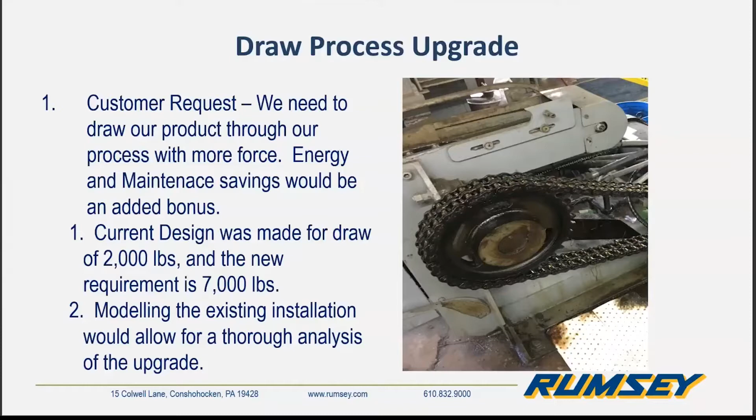So the process for upgrading this particular machine was to look at the draw chain itself, which would have to be upgraded because we're looking for 3 times the capacity out of the draw chain. And the existing draw chain just did not have that capacity. In addition to that, the sprocket that drives the draw chain would not be able to drive that new chain. So the first step is to analyze and select components for the draw chain and the sprocket.

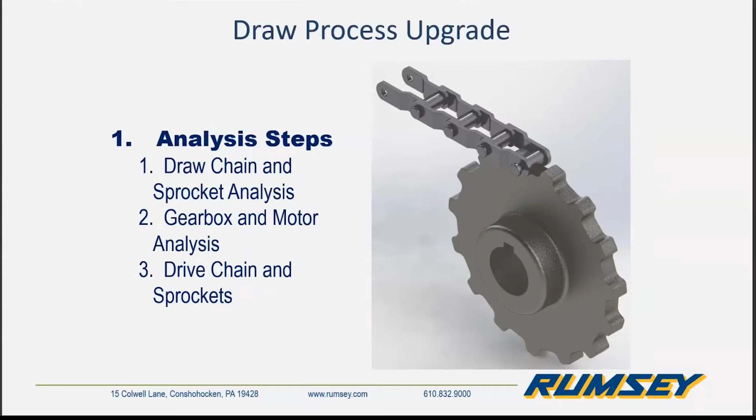And then the next step would be to pick a new gearbox. For the existing gearbox, we're looking at a worm gearbox with a 10 horsepower motor on it. That's what was originally on it. For that, we're also going to take a look at what we might be able to do to upgrade the existing dual roller chain assembly.

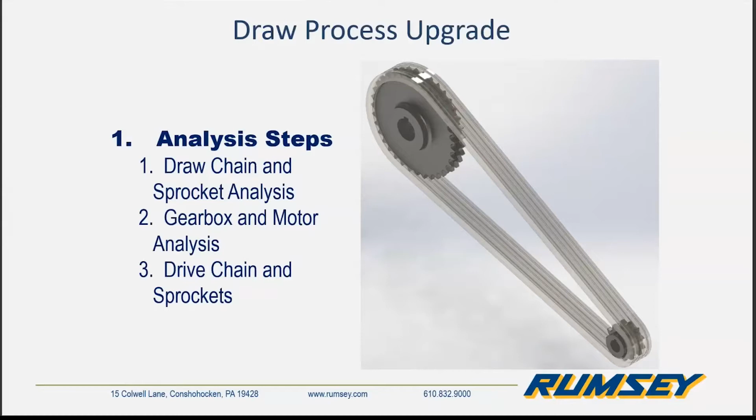Chain and sprocket, here's our first step. The challenge is that the new draw chain would be much bigger. All right. So what we need to do is take a look at the existing draw chain, the existing sprockets, and see what their capacity is.

And one of the requirements from the customer was to make sure that we did as much as we could to minimize the modifications to the existing structure. So even though these new components are going to be a lot higher capacity, they have to be able to fit into about the same space.

So there's a little video here. I'm going to show you, we're going to take these sprockets out. We're going to take this chain out of the existing setup just so you can see where they belong and how they have to fit in.

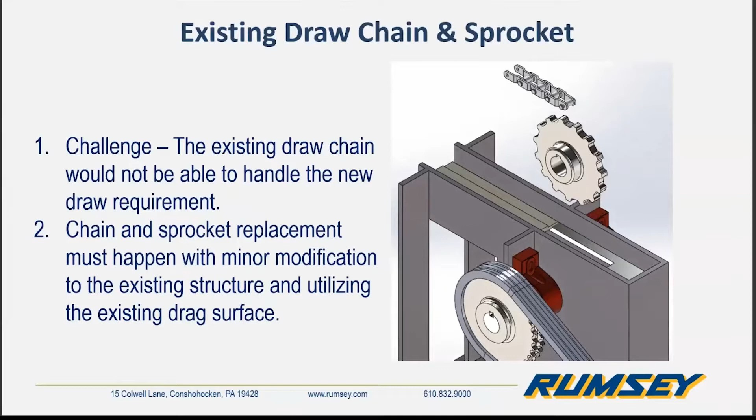Yeah, so when you work with engineered class chain, there are a lot of different designs for engineered class chain. There's attachment chain, which you can see in some of these pictures. There's some drag chain, which is the bottom left-hand corner. You're going to drag a product through, like wood chips. You're going to drag that off into a hopper somewhere.

There's a drive chain, which is in the bottom middle of your screen, and an agricultural chain, which is the bottom right and the top middle. So there are a lot of different engineered class chains. We didn't have to change anything. The existing chain was a drive chain. We're going to go with an upgraded drive chain. It is a roller drive chain, which is a little bit more efficient than just our regular welded chain.

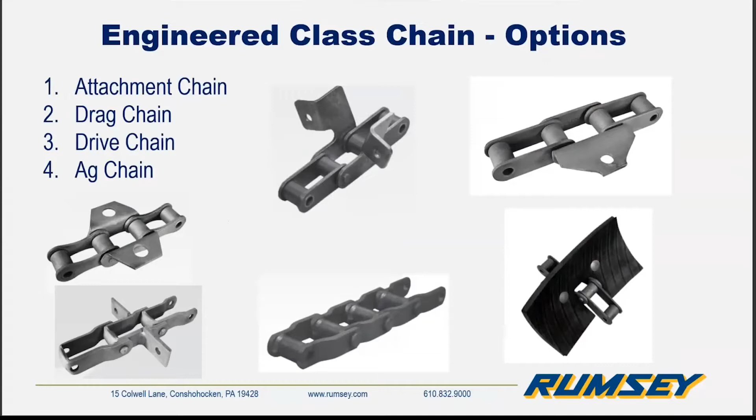It's kind of like an eye chart, but I'm not going to ask you to read anything. The new chain would have to be the same style to fit in the area necessary. But what we're looking to do is make sure that the service factor that existed, because this thing has run for the last 30, 40 years, was at least maintained or exceeded by the new design.

So the existing chain was an MXS 882 roller drive chain, engineered class drive chain, with a working load of 2,500 pounds. The original design load is 2,000, so your service factor is about 1.25 on that. So to get at a design load of 7,000 pounds, to get at least that service factor, we had to go with the MXS 1242 chain, which is much bigger. It's a higher pitch. It's about double the size, with a working load of 9,000 pounds.

Now we've selected, by the numbers, what that could be. Now, how do we fit? A lot of times when you change sprockets, you might use the same number of sprocket teeth. But in this case, if we had done that, the sprocket would have been at least 3 or 4 inches bigger, which would have meant a total redesign of the customer's structure. What we did instead was we reduced the number of teeth and found a sprocket that matched really close in size. In this particular case, the pitch radius only varied by about 0.3 inches, a little more than 1/4 of an inch.

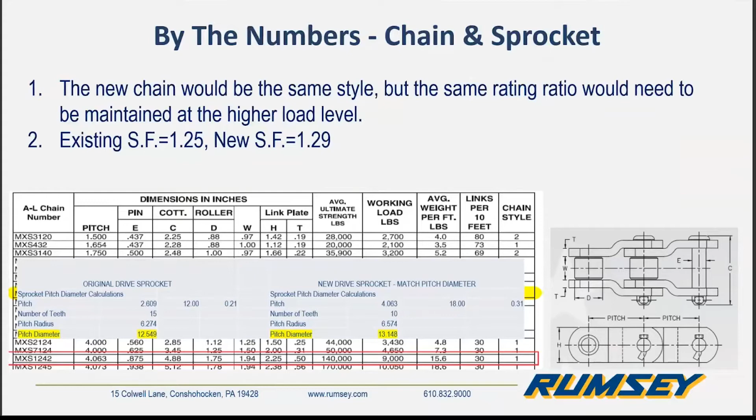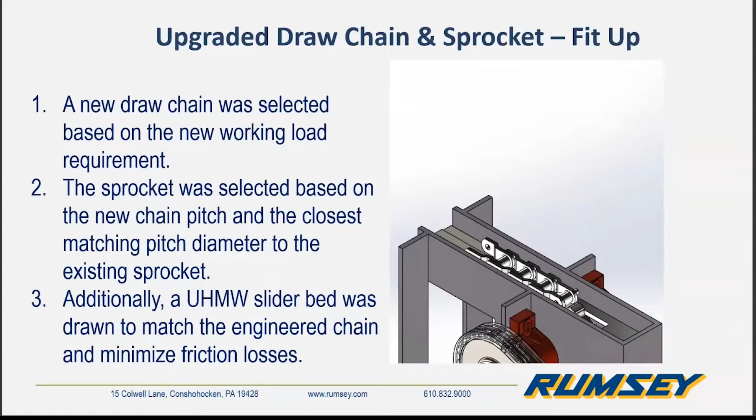One of the other things we did to minimize the friction losses on the conveyor bed itself was we added a UHMW nylon slider bed that really helps to lower your operational losses by reducing the friction. All along the 30-foot length of this drag bed, that nylon low friction surface was contacting the chain to minimize those friction losses. So here, what we have is pretty much a completion of the design, where the old sprockets are removed and the new chain is put on.

So you can see we actually made the structure transparent, so you could see the sprocket being installed on the shaft. Because we were able to find the right sprocket to fit into that space, the customer was able to do this with very few modifications to the original structure. And that really can't be done unless you do the modeling, unless you do the research and compare those dimensions and make sure that what you're doing is the right path toward the upgrade.

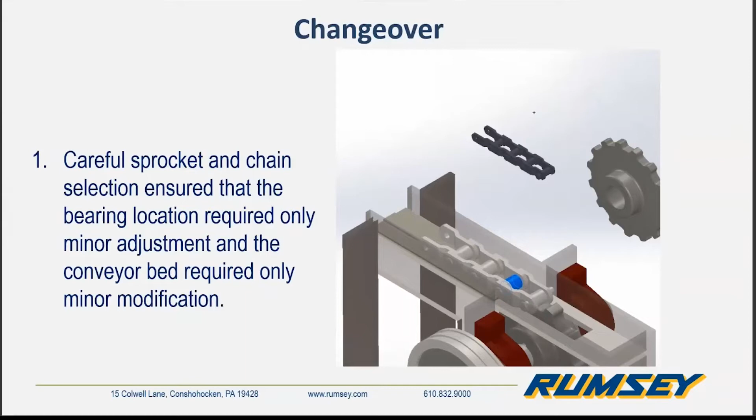Because you were able to change this and increase the capacity of your chain and your sprockets, the new chain and sprockets will allow a broader range of product to be run on this draw bench. What that means is if your old system was running for maybe 60 hours a week, because you can now run more and bigger and more varied product on the machine, maybe you're getting 80, 90, 120 hours a week on this machine rather than less. So that adds up to increased revenue because you're able to get more product out the door and higher availability of this machine.

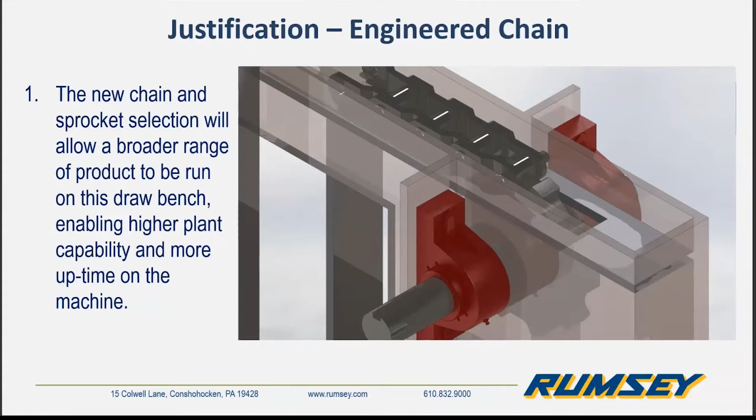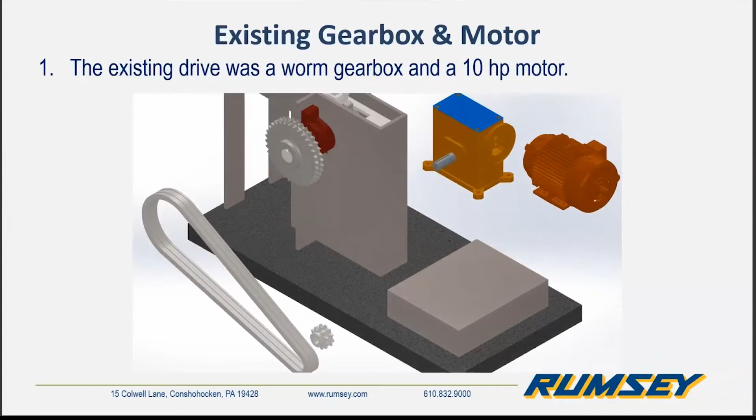Moving on to the drive system, the existing drive was an old worm gear and 10 horsepower along with a double roller chain and some sprockets. So here, part of our process is to download the models if they're available, and kind of take the system apart so that we know what we need to fit on and what we can use. Worm gears are very economical; that's what was existing. Worm gears are a lot lower efficiency than some of the newer gearboxes out there. So our goal here was to increase operational efficiency and save costs on runtime by changing over from this worm gear to something a little more efficient.

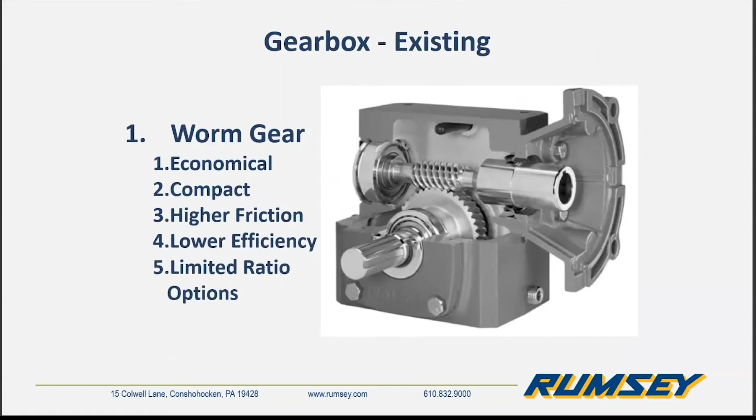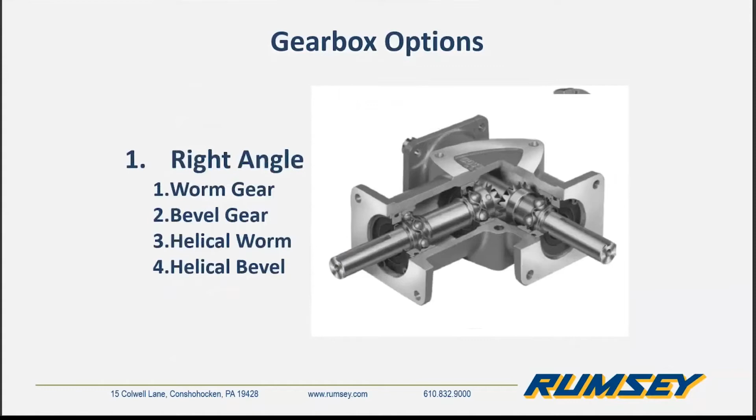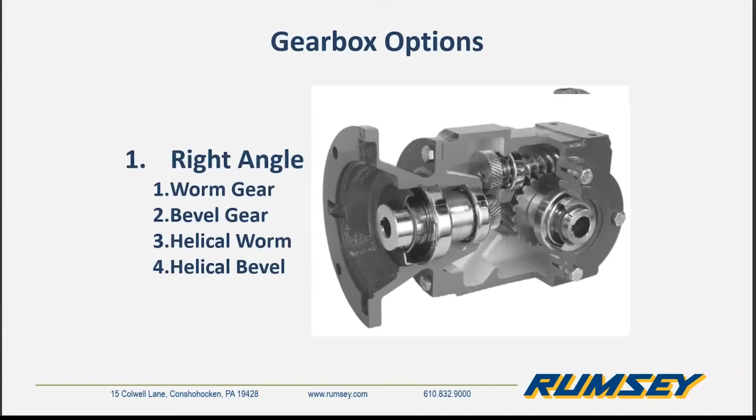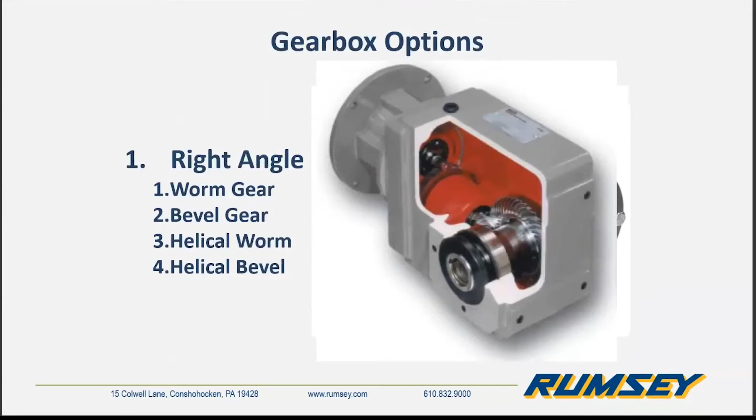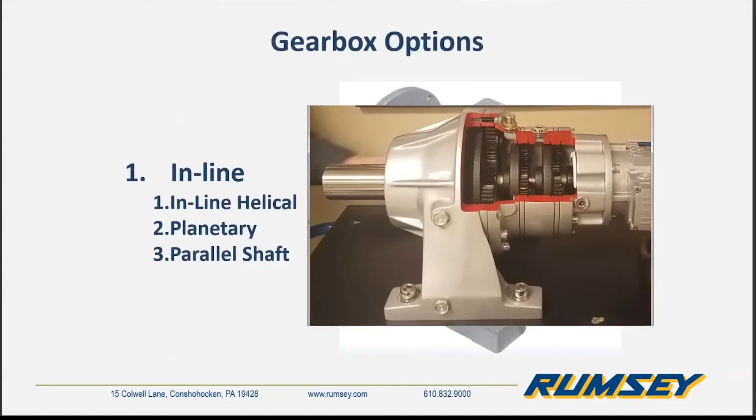These are much more optimized for much higher ratios than what was necessary here, and for much lower speed applications. And also a parallel shaft. That gearbox fits in certain niches, but it's not something people use a lot. Space-wise there are some niche applications it could be used in, but this one wasn't one of them. What we decided to go with was an inline helical because of its high efficiency, how compact it is, and the customer had some spatial constraints where they would rather have the motor point in the other direction, so we didn't use a right angle. They're also very economical.

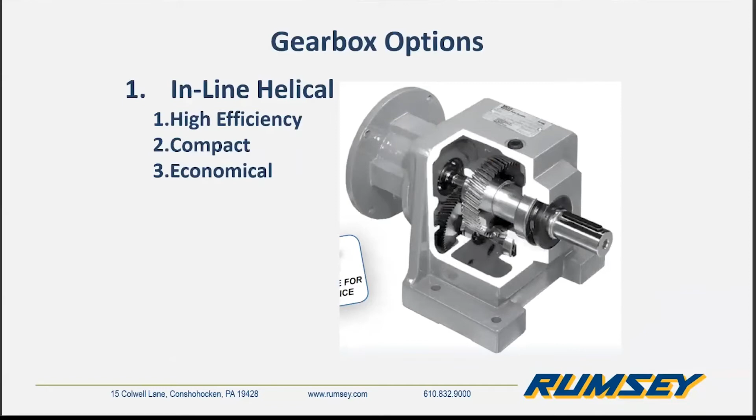Just an FYI, when you are picking a gearbox, when you're designing an upgrade, it is very important to make sure you understand the mounting position and that it is designated to the supplier, to the manufacturer, so that the lubrication is done properly for the gearbox. So the vent plug is in the right place, the drain holes are in the right place, and everything is mounted properly so that you can just install the gearbox and you don't have to move anything around.

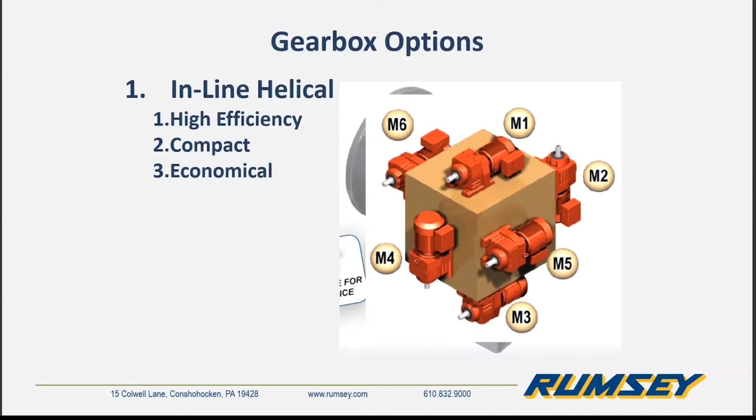From an efficiency standpoint, one of our reasons for doing this upgrade is to get a higher efficiency. We did a comparison on exactly identical units between a worm gearbox and a helical. And what we found, in an air-conditioned lobby running these things at the same speed, was that the worm gearbox ran about 25 degrees higher. Air conditioning about 70 degrees, right? Higher.

Not only is the worm box a lot less efficient than the helical bevel, the worm gears run a lot hotter, which means they just don't last as long. Heat is the enemy of mechanical systems. Your lube isn't going to last as long, you're going to have to change it more often, and your gear is just not going to last as long. So the helical gearboxes are a better way to go with most of your newer designs today.

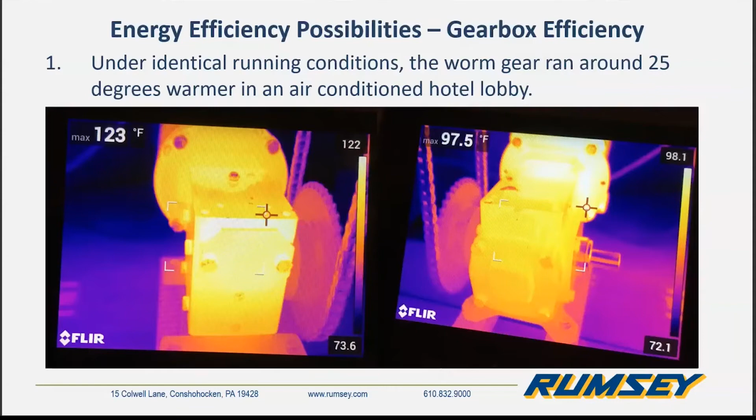We go from the drive side over from the draw chain all the way through the tables. What I really want you to look at here and pay attention to is the service factors, right? So it is at least going to provide the same level of service as the existing components, right? So in this, the drive shaft, to make sure it could handle the higher load.

Drive shaft had a 20 service factor based on the possible twist capability, if you're going to twist that shaft or not. Right now, you still have a service factor of 5, so we didn't have to increase the size of the shaft. Because we did look at that, because you have to look at every aspect of the design. And even the drive shaft that you think, oh, nobody's going to worry about that, it's going to be fine the way it is. We still look at that. We go to that level of detail.

And so we're looking at a gearbox service factor of 1.24 on the existing gearbox, and we ended up with the inline helical that we chose getting a 1.85 service factor. So we actually increased the service factor on that. And the 10 horsepower motor, which was just sized right for the application, we got up to a 1.42 service factor, which you see down here, going with a 30 horsepower.

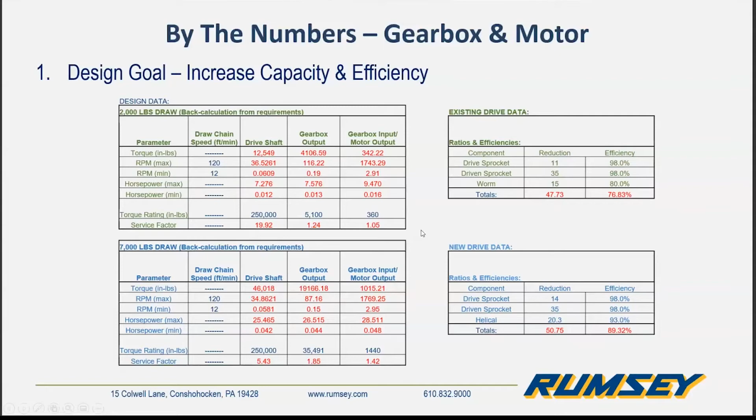Does the new inline helical fit? So we sized it to handle a 30 horsepower motor because we tripled load capacity on this gearbox and on this draw bench. So we had to go with a much bigger gearbox to handle the 30 horsepower. So we're going to take the existing drive sprockets, the existing chain off. We're going to drop that gearbox down to see how it fits in the installation, right? So as you can see, because we had to go higher capacity,

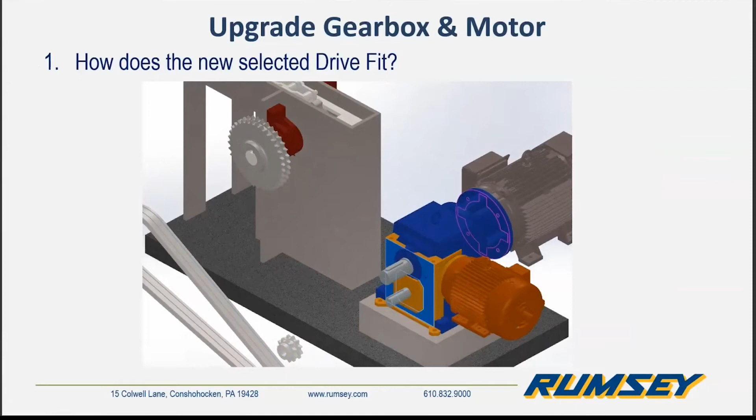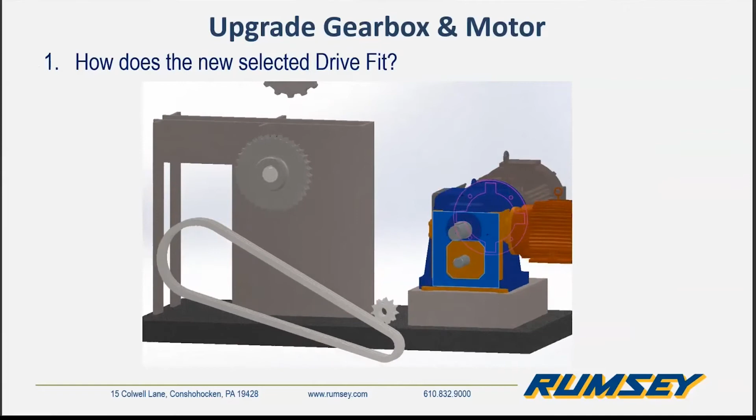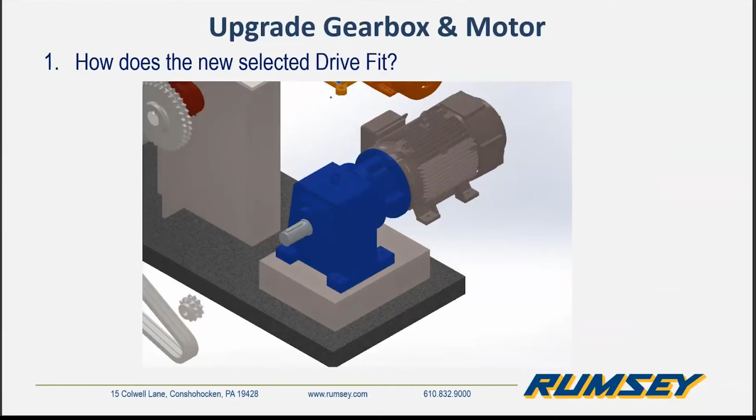the shaft is bigger, but we do check everything just to make sure the gearbox and front side shaft covered that. So this is all modeled in 3D. We model the existing stuff, we pull the gearboxes, and then we install the new stuff. As you can see, that new motor is much bigger because it is 30 horsepower versus 10. So in the end, after we do our comparisons, we'll just pull that old gearbox off, and now you have your new setup. This is what it's going to look like now: gearbox and your new motor.

Because your old motor was probably also a non-premium efficient motor, we now go with a premium efficiency motor and a high efficiency gearbox. So you're decreasing your operational expenses, or at least minimizing the impact of the increased energy usage, because obviously going from a 10 horsepower to a 30 horsepower motor, you're going to use more energy, but you're minimizing the impact of that cost increase and still getting the advantage of running more varied product on the machine.

And the new gearbox will also save money because of the lower operating temperature. This definitely allows for reduced maintenance, a reduced number of maintenance intervals and a longer gearbox life.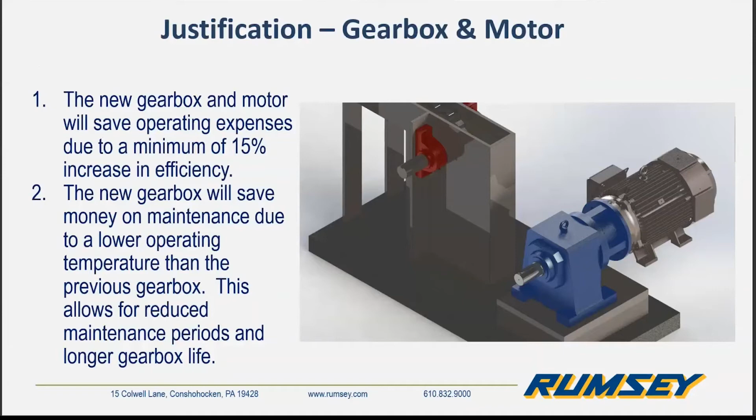If anybody's familiar with motorcycles, Gates Poly Chain is actually the belt that is used to replace the old roller chain that they used to use in all the Harley Davidson motorcycles. They now use this belt. I think the people who are really stingy probably still get their roller chain because they don't want to change. But these belts are quieter.

They're a little bit higher efficiency. They don't stretch like other belts would because it's a poly chain. It's designed not to stretch. And you don't have to grease them. There's no grease necessary. So dirt doesn't bother them as much as it would bother a chain, because dirt can get into a chain, dust can get into a chain, and you don't need the lubrication that a chain requires.

So the software that we use takes all of the operational characteristics into play. All right. So we got a 30 horsepower motor now, 1750 RPM. Take the gearbox speed ratio, look at the center distance, and even the shaft sizes, and what the ratio is of the sprockets. And the software actually spits out a ton of options, right?

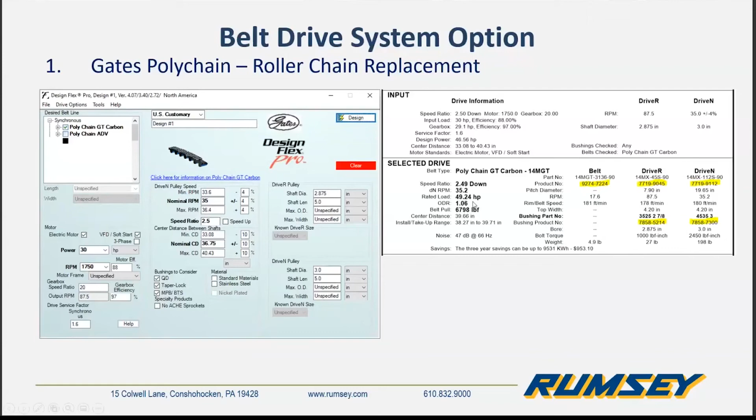this belt, and it's good for engineering documentation. If you're an engineer working on your OEM equipment, it's good for documentation. You're covered. You know what this is rated for. It's rated for 49.24 horsepower. So you're covered in terms of the ratings.

See a little video about how it matches up space-wise. You think you might need a much bigger pulley than a sprocket. Well, this pulley ended up a little bit bigger than the sprocket, and you think you need a really wide belt as well. In this case, we were able to go with a 90 millimeter, about 2 3/4 inches, 90 millimeter wide belt to replace this roller chain.

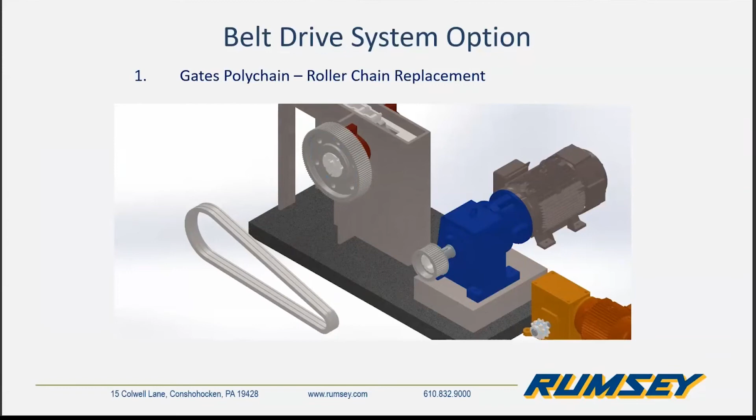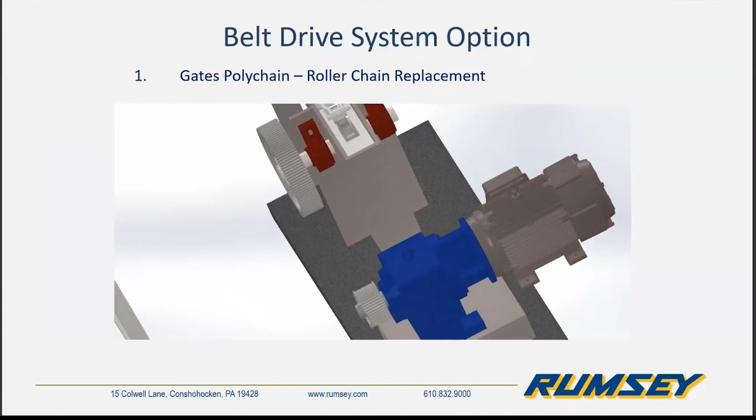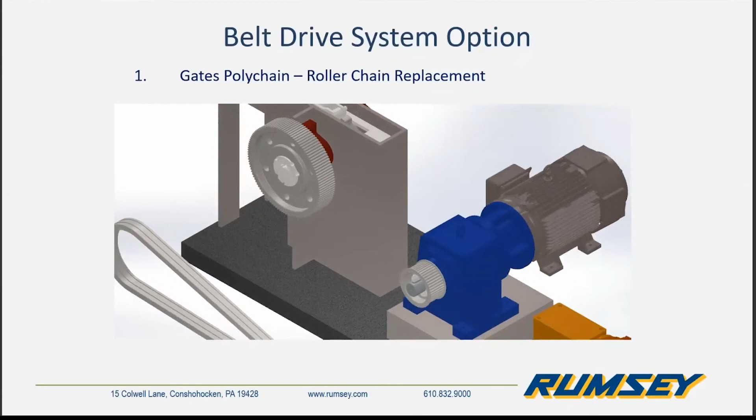Applications, easy to change things out if you need to. Okay, so the application for the belt drive is that you save money on maintenance. Somebody doesn't have to go out there once a month to do it. Some of the most expensive things are paying your people to get out there and do maintenance. And they have other things to do. When machines break down, they've got other work to do. Doing PM, preventive maintenance, kind of falls by the wayside when you're just trying to keep your plant running.

Also, the belt is a lot lighter than that roller chain. That double roller chain is very heavy. It's maybe 10, 20 pounds per foot. So trying to install that is also a challenge. So you minimize the pinch points, you make it easier to install and remove. And so you're saving money on maintenance in a couple of different ways with the belt drive upgrade.

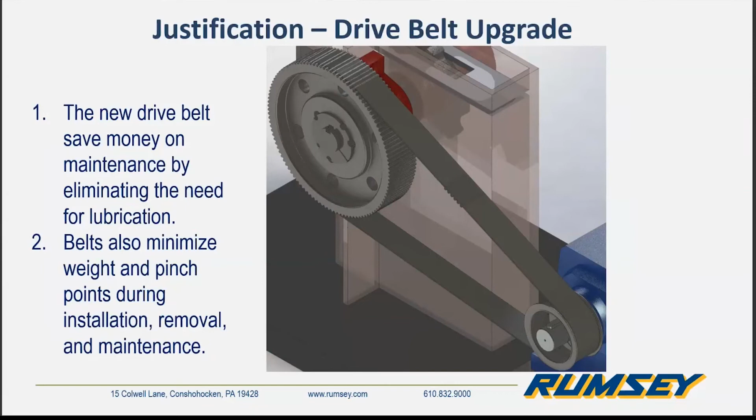What Rumsey provides is we work from the mechanical side all the way to the controller side. So many times I've worked with other specialists like the motion specialists and controllers and everybody else to make sure that what we're designing mechanically on the front half of the project can also be followed through with connection to the control side. The project that we worked on with the draw bench, we also did drives. We also did controllers. There was also visualization attached to that.

So when you're working with Rumsey to take care of a project, we're capable of handling the entire thing and trying to guide and help you and assist you with the entire system, not just the mechanical, not just the electrical, everything from the bottom up to the top.

We help with encoders, pressure sensors, load cells, instituting load cells, torque arms, giving you torque measurement of your application. All kinds of different possibilities are available. We didn't happen to do that on this application, but we have on others. And we will work internally to help present the best options to you as a customer from the mechanical side all the way to the top of the electrical side.

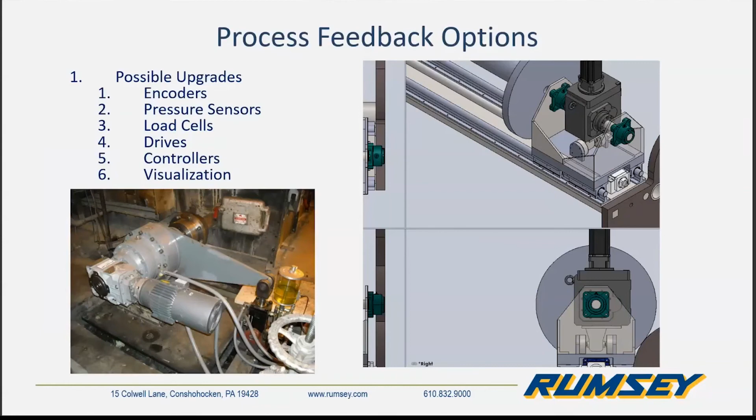Great. What we achieved was increased capacity for your machine, increased availability and uptime. And we did all that with doing very few modifications to the existing structure. And with that extra uptime, you increase revenue opportunity. The machine might not be running, but it is available to run more and more often.

We increased your operating efficiency and reduced operating cost due to the higher efficiency gearbox, higher efficiency belting, the higher efficiency motors. And we were able to lower the operating temperature to reduce or eliminate lubrication requirements so that you have a reduced maintenance cost. So that's how you are able to justify that.

All of these advantages give you the ability to go to management or coworkers even and show them how a PT upgrade can actually help save you money in the long run.

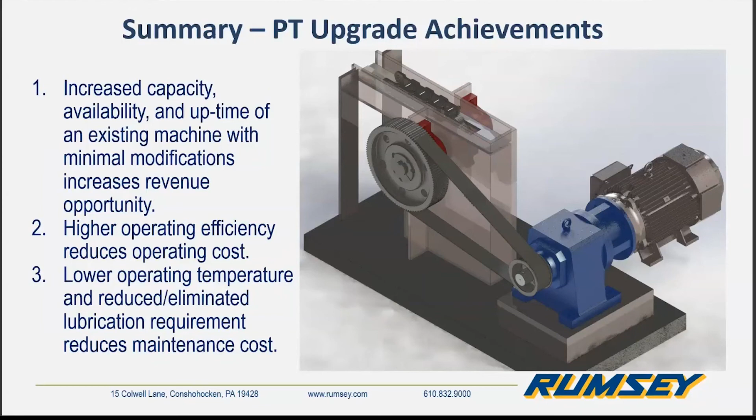So Rick, the one thing I would also add in there, and we've seen it kind of across the board, is some of the older machines that have been out there are built very, very well. Lots of iron in them, and ultimately they've lasted and worked for a long period of time.

But maybe where they're lacking in some cases is just getting the correct information out of them for the process itself. Everything in the world of Internet of Things has a lot to do with how is my material being made? What are my tensions? What are my torques?

All of that stuff can be upgraded on a lot of older machines that probably aren't quite ready to go to the trash heap just yet, but sometimes just need to be looked at to see what things can be added to them to give you more information around your process. And I think that's one of the main reasons for that one slide you had of other things we ran into, as far as the addition of load cells and other types of items.

And some of the vendors that we work with have a lot of that built into actuators and other things that can allow you to get a lot of information out about a particular product. So hopefully the idea would be you could take that and fund a job based on the fact that, hey, my machine fundamentally is still built very well. It's going to cost a lot of money to get it out of here. But if we just add some of these other niceties to it, we can get what today's world needs out of the material that we're making.